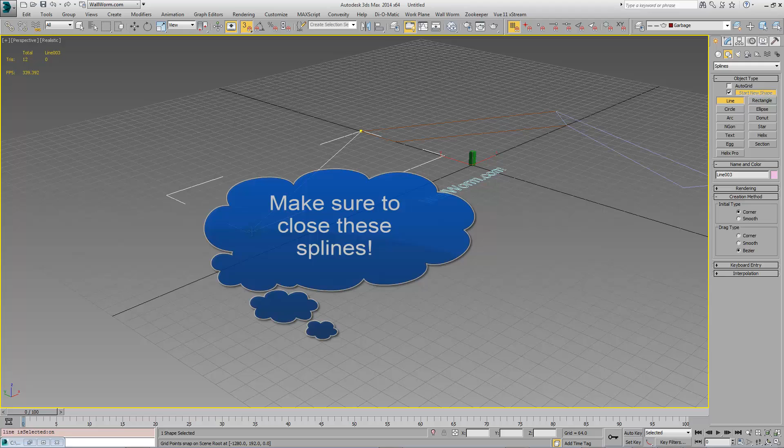We'll do something slightly complex so you can see a little bit how you might make things in Max. We're going to snap to the grid and turn these lines on here, and I'm going to make some of these. I'm just making the outline to a non-rectangular room. And remember to keep these snap to grid on.

Oh, can't do that. That would be unconvex, be concave. So you have to make sure that these shapes that we're making right here are going to stay convex. When you're making world geometry, which is the layout part of your map in Source, you always want to remember that everything has to remain convex.

And we made a failure here because I made a looped line. I'm just going to delete it and start over, it's faster. So when you're making these lines, you need to make sure that you don't click and drag, you just click and move.

And we're going to finish this off, like that. In reality, this outer one isn't necessary because it's sealed off right there. So this is going to be the outer wall, and then I'm going to make one more that's aligned to all of these points, and this is going to be my floor and my ceiling.

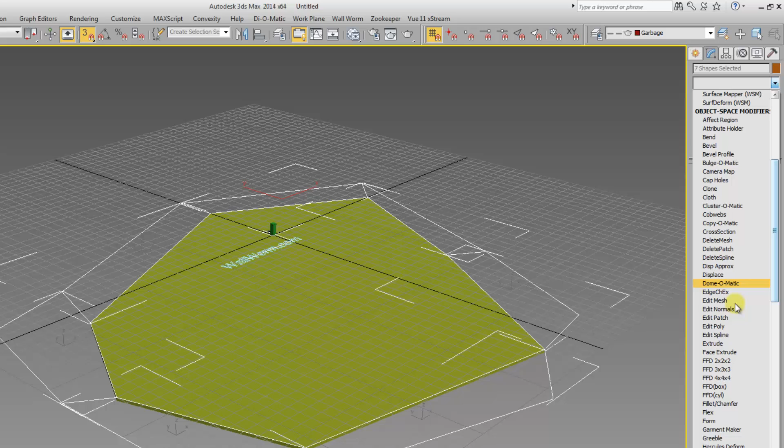So then I want to select all of the lines that I just made. And to make sure I'm just selecting lines, I'm going to choose shapes, and I'm going to deselect my internal one there. And I'm going to add to these a modifier, again extrude. We're going to extrude these by a total of 256.

There we go. So now we have a floor that's not rectangular. I wanted to do that because, you know, everything's always rectangular. And we have walls. The next thing we want to do is copy our floor

and move it up to the top here. I can right click and hit move. I can click the move icon up here, or the shortcut is usually W to move something. Now if I wanted to snap exactly to the top of this, I have some nifty tools here.

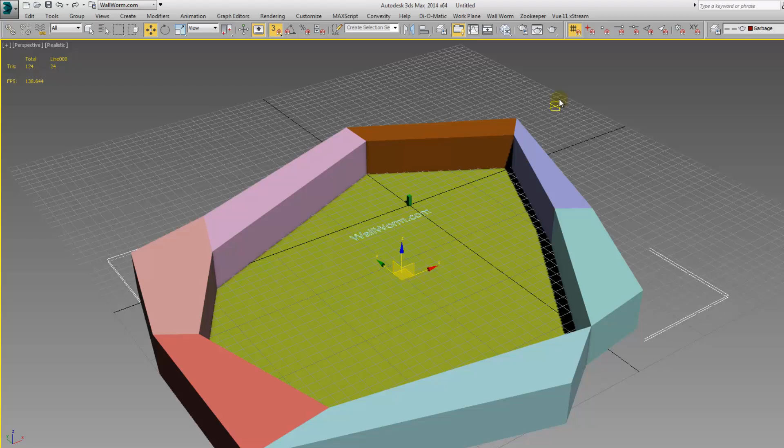I'm going to turn off snap to grid, then turn on snap to vertex toggle. So now it's only going to snap to the vertex of my shape. And if I want the bottom of this, this vertex, to snap to this vertex up here, all I have to do is shift drag that up to that point, hit OK, copy, and now there's that.

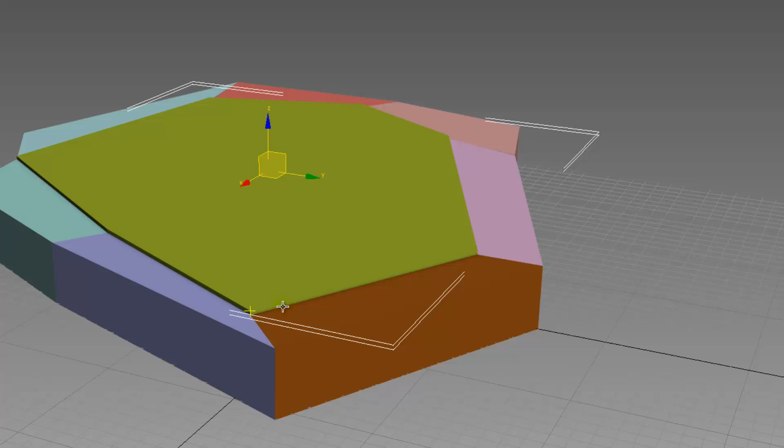I'm showing you this because a lot of people that are used to Hammer and coming into Max have a hard time understanding how you move things around. It's really simple once you learn how to use the various forms of snaps, and you can use the transform type-ins, etc. There's way more ways to do things in Max than Hammer. Just got to get used to them all.

Now let's put a material on these things, the walls. First of all, let's select all of these walls, and we're going to add these to a layer.

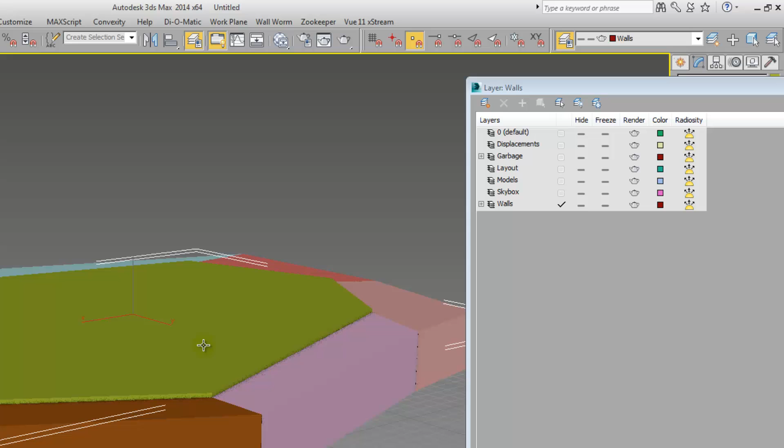I'm going to open up my layer manager, and I'm going to create a new layer. I'm going to add a brand new layer. I'm going to call it walls. And then I'm going to actually pick the floor and the ceiling, and I'm going to add those to the layer. And I'm going to hide the layer currently.

And now we're going to just select all of those walls, and we're going to apply a material. You can open up the material editor, and we can create a new material, but I'm going to use some materials from CS already. I'm not going to make my own right now. And we'll use this just brick wall.

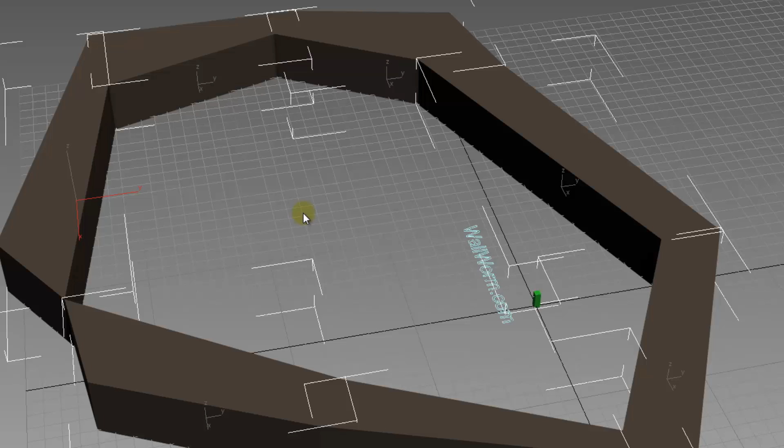I'm going to put this out here. I'm going to assign that to the selection. Now notice I don't really see anything out here. And one of the reasons this happened is because these objects that I made don't have any mapping coordinates.

We can go over here and generate mapping coordinates, and that will do us for now. You have a lot of control in Max over controlling these maps, and I'm just not going to get into that right now. But I wanted to show you that if you have an object that has an option that says generate mapping coordinates, you click that and it will put the mapping coordinates and allow the textures to appear. If that doesn't work, you have other tools like UVW map modifiers.

So now I'm going to go back to my layer manager, and I made a mistake by not naming my objects. Line 9, I believe, is the floor. I'm going to unhide these, hide line 10, so I know which one is which later. I'm going to select my floor and give it a name. Floor.

Likewise, I'm going to select the ceiling here and label it ceiling. It makes it easier later when you look at the objects in the list to find out what is what. So again, I'm going to hide the ceiling because I want to put a texture on the floor and see what it looks like.

We're going to find another texture from CS. We'll just use the cellar floor. I can drag it out here onto the object, but I'm going to put it out in the material editor so I can see the stuff.

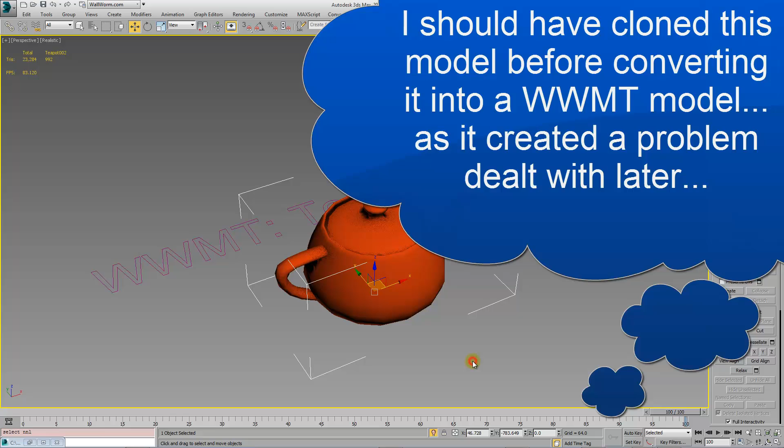And we're going to say that when this guy gets blown up, it turns into some other stuff, and we're going to turn it into all the pieces of itself. Okay, so what I want to do is clone this as a copy, and I want to convert that teapot that copied into an editable poly, and I want to detach each piece as an object.

Detach, detach, and okay, that's fine.

I'm going to open up Wall Worm Model Tools. I'm going to select my model here, and I'm actually going to hide it, and I've only got the pieces here, the chunks. The reason I did this is because these pieces actually still have reference to this model. If I right click, go to properties, I'll see this here. And because it's tied, the way I need to untie that is I go into these object properties and delete those. I should have done this at the object level, but there's only a couple of them, so I'm not going to redo it. And I'm going to delete this.

So I should have done that before, right after I copied that teapot and then broke it up. So now I have these 4 pieces, and to designate them being different when it breaks up, they're not only pieces, but I'm going to give it a different color.

We're going to open up the material editor here, and we're going to make a new material for these, and we're going to call it Broken Teapot Blues. That's the name of our material. It's going to have a bluish color, and we're going to assign that to this whole teapot.

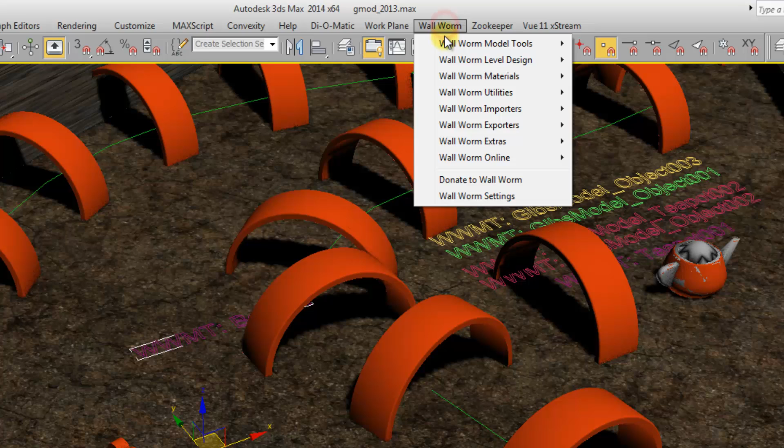And now while we have those 2 WWMT helpers selected, I'm actually going to export their textures, selected model textures. And that didn't give us any confirmation, because it usually doesn't if there aren't textures or bitmaps to compile, but you can see it made all the VMTs that I needed.

At this point, we can add a couple spawns if we want. We can do that under Level Design, Point Entities. And if you see something like this, it just means you have to go to your settings and tell this mod that we're using a certain FGD, and there we should go. If you happen to continue getting that, you can always go to your Wallworm settings and hit this reparse FGD, or choose when you change between FGDs, it will reparse them and make your entity cache.

But once you have that, then you can go to your entity tools, and we'll just add a spawn point here too. Info player terrorist. I'm going to turn on snap to face here. And we've got a terrorist, a couple terrorist spawns, and now we need a couple counter terrorists. There we go.

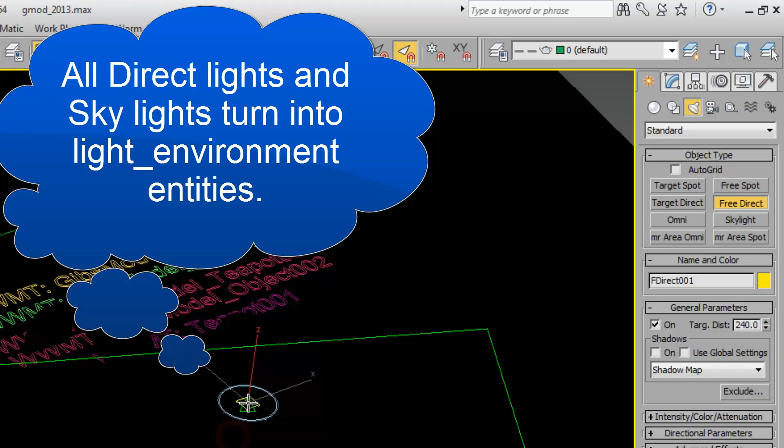So we want a directional, so we'll do a free direct here. And we'll move this guy up a little bit. We'll rotate him like this, and this will turn into a light environment.

And to make it so that this whole scene shows correctly, we're going to turn on overshoot, and we can do cast shadows if we want for rendering purposes.

There we go. Here's our light. Changing the color here, and the multiplier will be the color and brightness of your light.

Unlike Hammer, which always knows that everything you're creating inside of it is convex world geometry, Wallworm is not like that, because you can create anything: models, and your convex geometry, all at once.

Because of that, you have to tell Wallworm what is your world geometry. In this case, it's the outlying details. I can select my walls really fast. I'm going to right click this layer, hit select. So I need to tell Wallworm that these are world geometry. One way you can do that is opening up Level Design and hit set selection as brush geometry.

That's important. I also need to do that to the ceiling and floor, so I'm going to select those and do the same thing. If I don't do that, the compiler will crash.